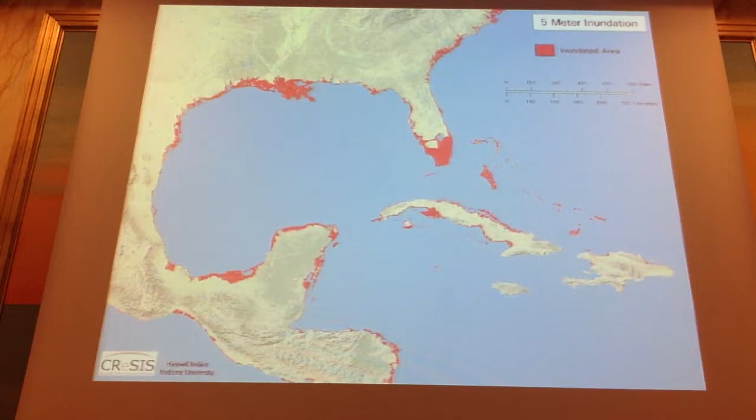So what we have to expect is basically water rise all over the world, and even if it's just 5 meters, that will really have a huge impact on a number of countries like the United States, Asia, Europe, and Venice as well, to give just a few examples.

And so our current approach is regulation. We would sit together, the governments of the world, and try to negotiate a law, a contract, whatever, and that would be implemented on a global scale, basically telling companies and countries and citizens what to do.

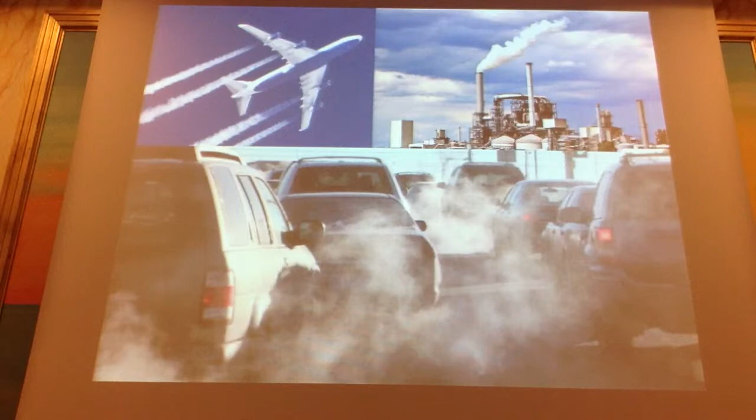However, negotiations have been going on for many years now, and this law is still not in action. And as a consequence, basically, it happens that we still have a lot of pollution, we have a lot of CO2 emissions, and we are far away from the goals of CO2 emission reduction that we wanted to reach.

So the question is, this top-down approach, where basically there would be something like a world parliament that decides what everyone has to do, is this maybe not so efficient as we expected it to be, and are there any alternatives? Because we don't have the time to wait, we have to act, we have to come up with solutions. I'll come back to this at the end of my talk.

And altogether, I'd like to argue for a new paradigm. This paradigm basically says that if the complexity of the system is large, then you have to give more autonomy to the different components of the system to achieve your goal. That means you need to have a sufficient level of bottom-up involvement. Just telling people you shouldn't travel anymore, you should not use your car anymore, won't do it.

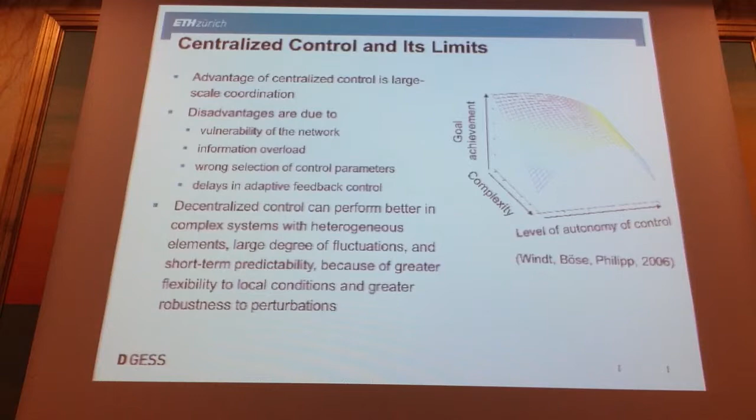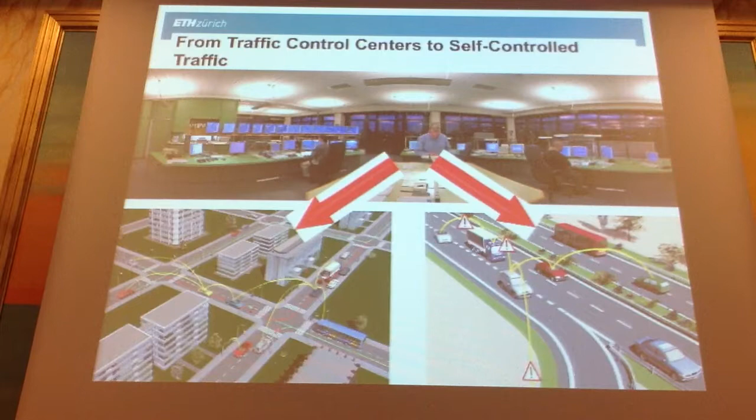In fact, we see now a trend towards decentralization. So classically we had traffic control centers to take decisions for the entire city or for the entire freeway. While today we have new kinds of technologies which are based on local interaction, local information exchange, such as car-to-car communication or car-to-infrastructure communication. And so this is actually on the way, and it seems to be superior to what we have done in the past.

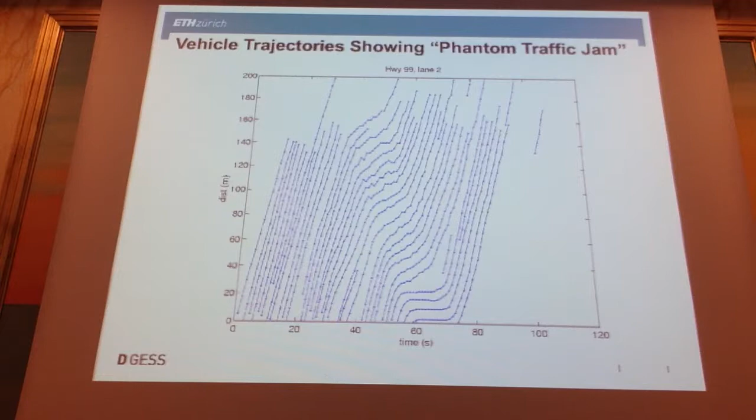So let's look into the problems that can be solved in this way. One of these problems is actually phantom traffic jams, and here are some trajectories. As you can see, the free traffic flow that we have on the left is basically giving rise to a traffic jam. The cars obviously are stopped for some time. So the question is, how can we get rid of this annoying phenomenon?

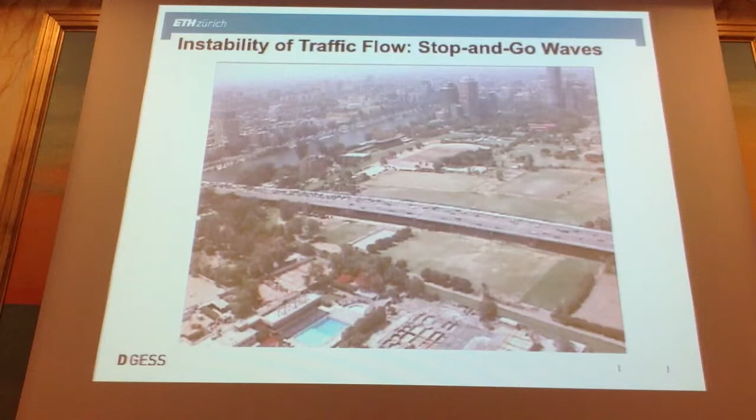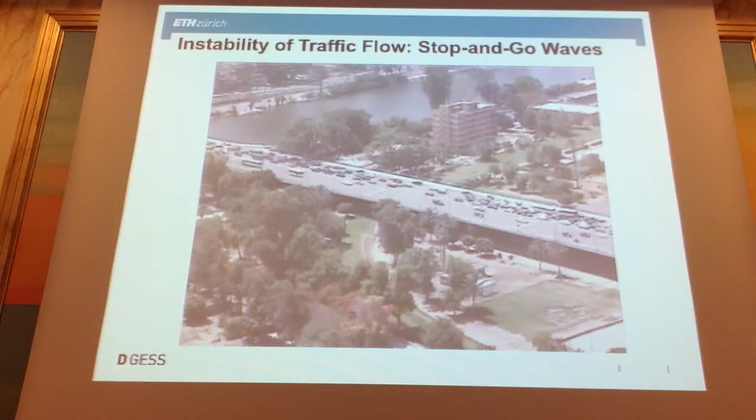Here's a video that I took in Egypt, in Cairo, and you'll be a witness of the emergence of a traffic jam on the left. There are no traffic lights, also not downstream. So now you can actually see the stop-and-go phenomenon. And you see a few cars coming in on the right, and these are the cars that basically create small perturbations to the flow. As I explained last time, these small perturbations are amplified and eventually give rise to the stop-and-go traffic.

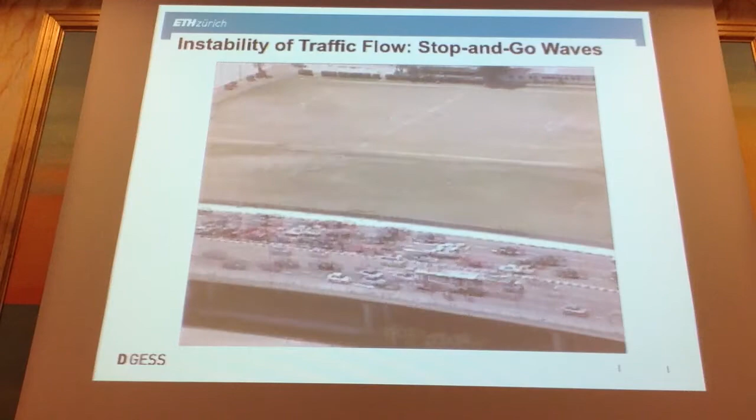So this is something that we want to understand in terms of models, and once we have an understanding of the phenomenon, we can start to come up with solutions.

Congestion patterns are actually surprisingly complex. So when we started to do traffic modeling, many people thought, okay, maybe there is a bottleneck, and behind the bottleneck there are queues of vehicles because there's not enough capacity to serve them all, and the queue grows over time. That was kind of the understanding.

And others were thinking about these periodic stop-and-go waves, but such kind of complicated structures were basically not imaginable to most scientists. There was not the data actually to look into this structure, and as the data became available, scientists were pretty amazed, if not shocked.

And I should say, if I had seen that in the beginning when I started to do traffic science, I would probably have decided to go for another subject because this looks just too complicated to come up with a mathematical model, you would think. But by that time, I had a reputation to lose, and so we had to show that we can understand this, and actually we succeeded.

So what we did is basically we looked for repetitive patterns, for elementary patterns in the congestion pattern that I showed you before, to understand those complicated congestion patterns as a composition from elementary patterns. And these are the elementary patterns. Top left is a moving localized cluster, as some people call it.

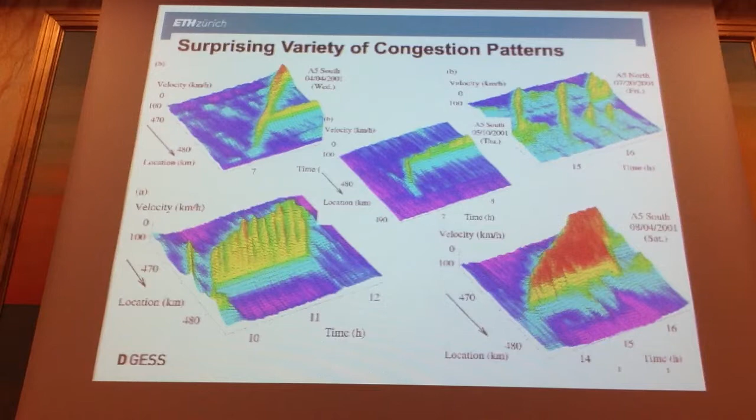Top right, stop-and-go traffic. Bottom left is oscillating congested traffic, and bottom right is homogeneous congested traffic. So the question is, what are the conditions under which these kinds of phenomena occur? Can we come up with models for this? In fact, one of those models that describes all those phenomena, these elementary patterns, is the intelligent driver model.

It's a micro model which looks at single cars. It has two equations. One equation of motion, the first one, basically says that change of location of vehicle alpha with time is given by the speed, and that's trivial. But then the question is how to model the change in speed—the second equation, the acceleration—and somehow that depends on the distance, on the velocity, on the relative velocity, delta V.

And there is another quantity in here, which is this quantity S star, which represents the desired distance as a function of the speed and the relative velocity. It's basically chosen in a way that you would create accident-free driving.

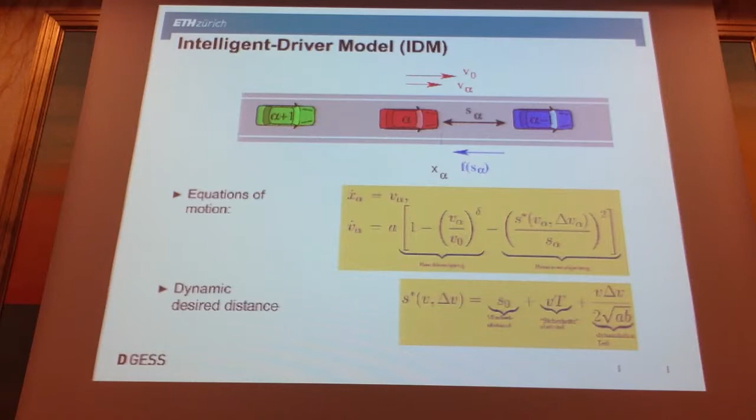Okay, so this can be simulated, and with models like these, and also some macroscopic models, you find patterns such as the ones shown over here. In fact, we have the moving localized cluster, pinned localized clusters, stop-and-go waves, oscillating congested traffic, and homogeneous congested traffic.

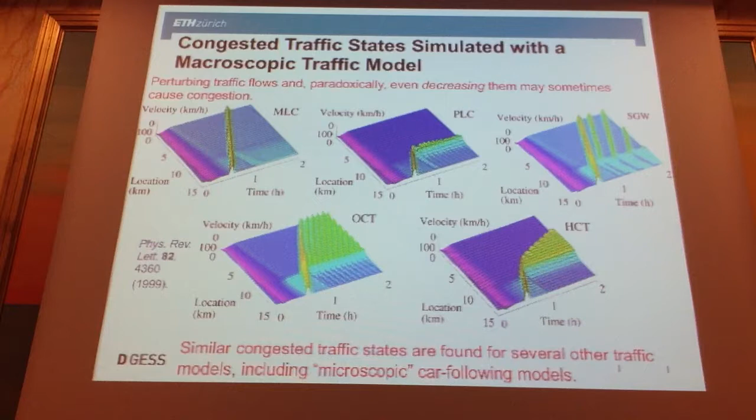Even though this simulation was done with a very simple model, we have reflected here that there are cars and trucks with different driving styles, and all these kinds of things. So despite all the simplifications we made, we find these ideal, typical elementary patterns. And in fact, it's even possible to understand the parameter regimes under which these different kinds of patterns can exist, in an analytical way.

So we call these diagrams phase diagrams. What it shows is the upstream traffic flow on a freeway, Q-up, on the y-axis. We're looking here basically at the freeway with an on-ramp. The on-ramp creates a flow, delta Q, that is the inflow.

It basically takes away a certain capacity from the freeway. That capacity used for the inflow is not available anymore for those vehicles that come from the upstream part of the freeway. So delta Q is a bottleneck strength, you could say, but at the same time it's the inflow. And so basically if you add this up, Q-up plus delta Q, that's the total traffic volume downstream of the on-ramp.

So what you see is as the total traffic volume increases—as we go from bottom left to top right, traffic volume increases—we go from free traffic to congested kinds of traffic. Red and brown is congested traffic. And you can see two diagrams here, and that's interesting.

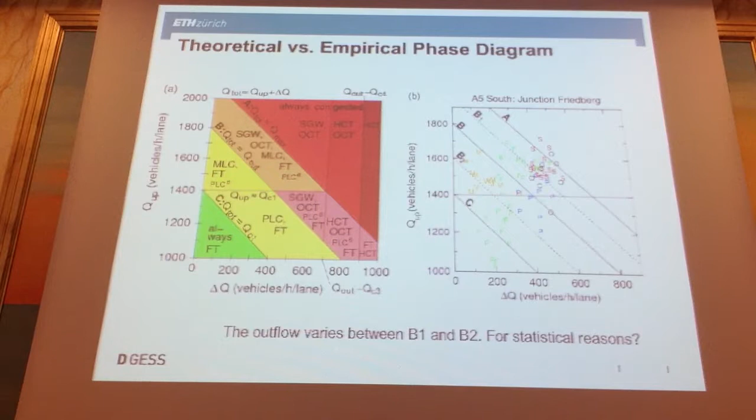The nice thing is that the empirical data are well consistent with the phase diagrams I showed you. You can clearly see clusters of certain traffic states - localized clusters in orange, pink, localized clusters in blue, the stop-and-go stuff in red and black. There is a nice agreement, and in fact we've even been able to calculate the extension of the congestion patterns in space and time.

So these are predictive models. Even though these are nonlinear, complex models, there is now an analytical theory of these kinds of traffic patterns, and this is a powerful theory - a big success story of complexity science, I would say.

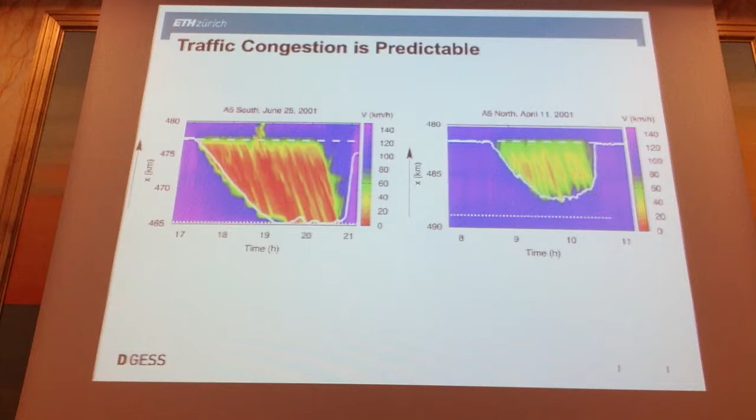Now the interesting point is that cars are becoming intelligent now. Of course you can equip them with all sorts of sensors, and there is onboard data acquisition, which we could call perception. There's inter-vehicle communication. But the question is, what is the traffic state that my car is in? Maybe you cannot determine this clearly from the data you can measure - distance data, acceleration data, and so on. It could be one of several congestion patterns if you just rely on your own measurements, so you would like to exchange information with cars in the neighborhood to learn more about the situation in this area. That's why we need inter-vehicle communication.

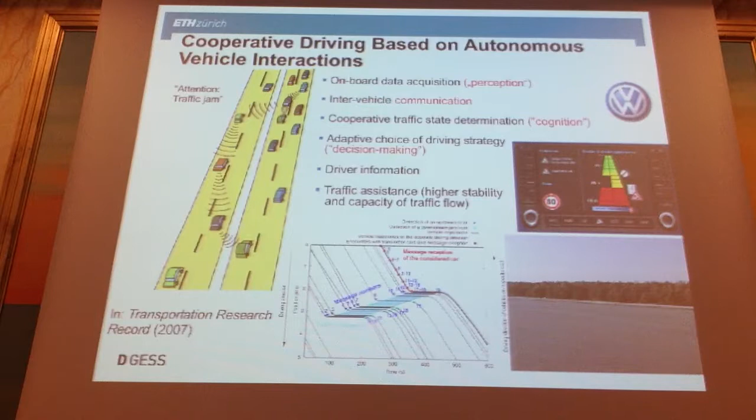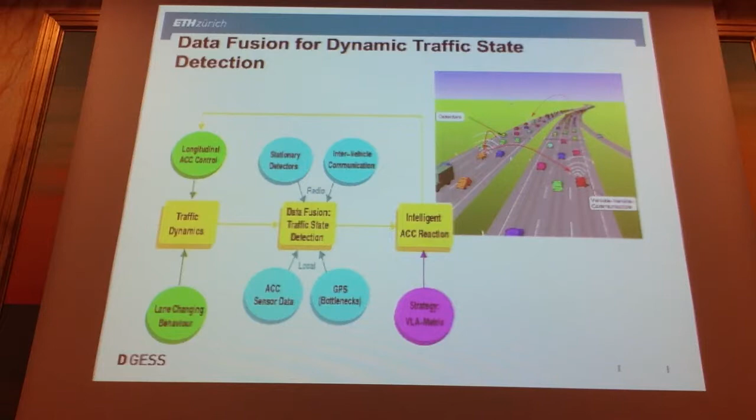Now, in fact, there are a number of different data sources merged in these kinds of systems. We have stationary detectors, inter-vehicle communication, GPS sensors, acceleration sensors, and so on. So today, more and more of these sensor data are being integrated to get a better picture of the situation you're in. Then the question is, what do you do in what kind of situation? Maybe you remember that in the intelligent driver model there were a number of parameters like acceleration, deceleration, time gap between cars - all of this is being recorded.

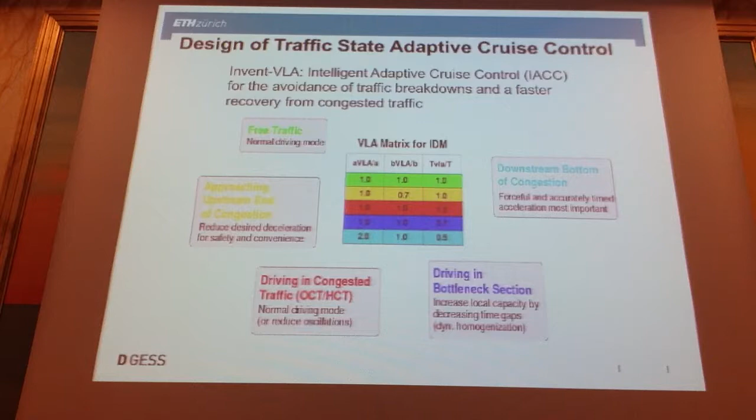And so if you implement this, actually, as I already showed you last time, we can overcome this annoying stop-and-go traffic.

So what we have on the right-hand side is the coffee meter, and Martin Treiber, who programmed this, is very proud of it, of course. This is a measurement device that measures abrupt change in acceleration. So if it spills over, that means it's not a comfortable driving situation, right?

Now, we also invented this car that can be turned into a helicopter, and that allows us to see what are the reasons for the stop-and-go traffic. The perturbations are basically created by the few cars that want to get on the freeway. We accelerate the presentation, but the inflow stays the same all the time, still stop-and-go traffic.

Then we turn on the traffic assistance system. It's based actually on a particular kind of adaptive cruise control. It means really local interaction only. And the adaptive cruise control, however, has been designed in a way, and interactions have been chosen in a way, that the interaction would create a collective effect, a beneficial collective effect also for the other cars.

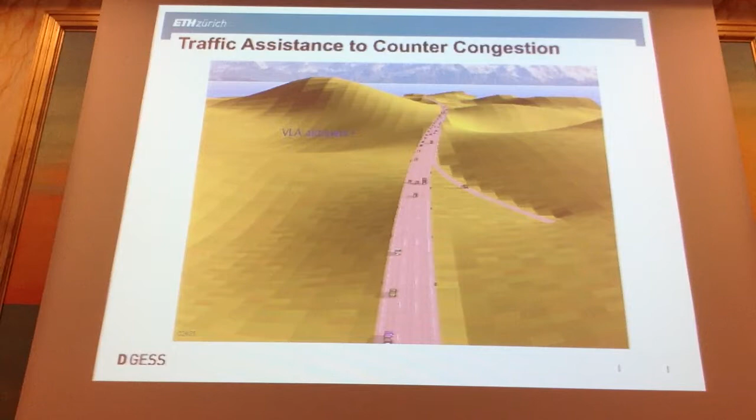That means even if you have only a 20% equipment rate, all the cars would benefit from this, as we see over here.

So in the middle, you can see as the percentage of equipped vehicles goes up, there's a dramatic drop in the temporal extension of the stop-and-go that we can see on the left. With no equipped vehicles, you have a large congestion. With 10% equipped vehicles, it is dramatically reduced, and with 20% equipped vehicles, there's almost no congestion anymore.

When you look at travel times and fuel consumption, also the effects are very large. In fact, a small deficit in capacity is actually producing really tremendous increases in travel times. The travel times could basically multiply by a factor of 2 or 5, sometimes even more. So these increases in travel times can be largely reduced.

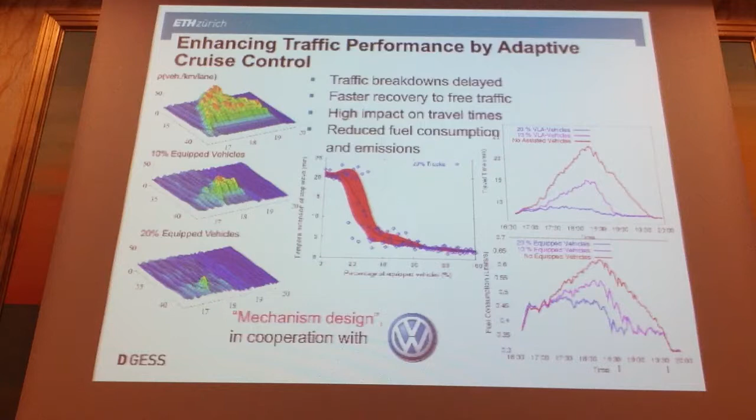And that was very important because in the past, many strategies would work only if all the cars would be equipped.

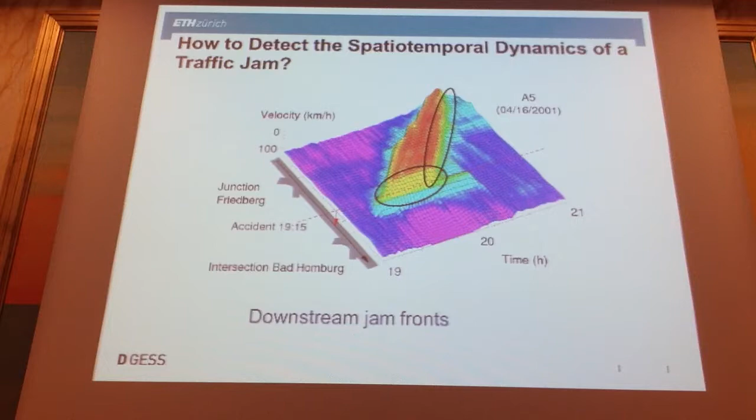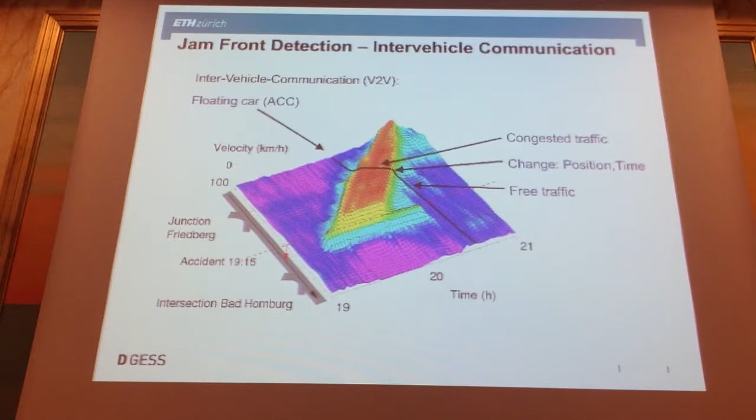Now, one of the open questions still is, how do you determine the location of the congestion front? And that has been done also by means of inter-vehicle communication. You can determine the trajectories of vehicles through these congestion patterns, and there are certain areas where the cars accelerate, and other areas where they don't. From these points, you can basically collectively determine again the location of the fronts.

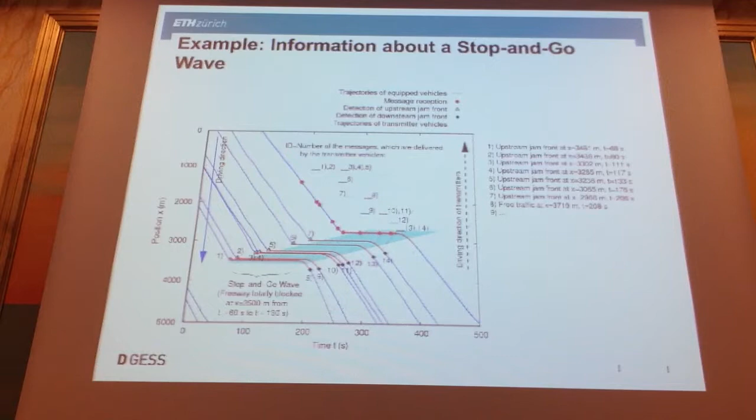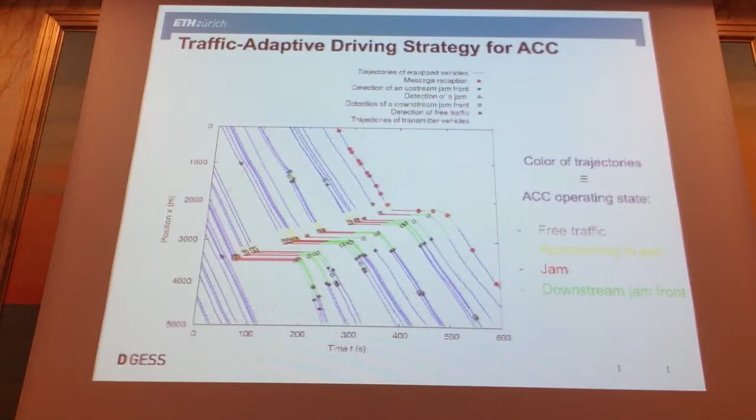And that allows you then to switch basically the driving style as needed, so you can see that over here. So collective measurement, collective intelligence also in a sense - now it's important to be able to solve these problems based on local interactions, but it can be done.

And then another question was, how do we make inter-vehicle communication effective? Because the communication ranges are just about, say, 300 meters around a single car, and in the beginning there wouldn't be many cars who also have inter-vehicle communication devices in them. So there's nobody to talk to, you cannot communicate your knowledge to others.

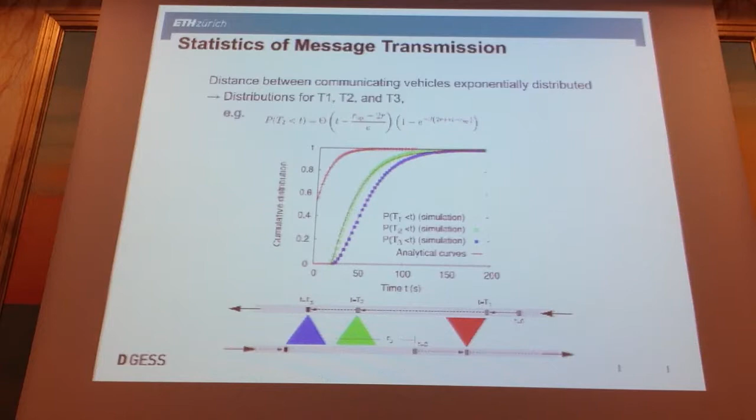If you pass your information, the red triangle, to the opposite direction of motion, it's just a matter of time until an equipped vehicle passes by. You hand over your information, that vehicle carries it upstream and passes it back to your driving direction. Starting from 3% of equipped vehicles, this kind of communication becomes useful. So that's other-regarding information - you have to collaborate with the opposite flow of vehicles.

This is a way we could address traffic flow problems on freeways. In many cases, you wouldn't have to build additional lanes or roads, you'd just manage space more efficiently with modern information and communication technology. Of course, we cannot infinitely increase capacity, but it's probably a more environmentally friendly way of overcoming congestion problems than classical approaches. From that point of view, it's the smart approach.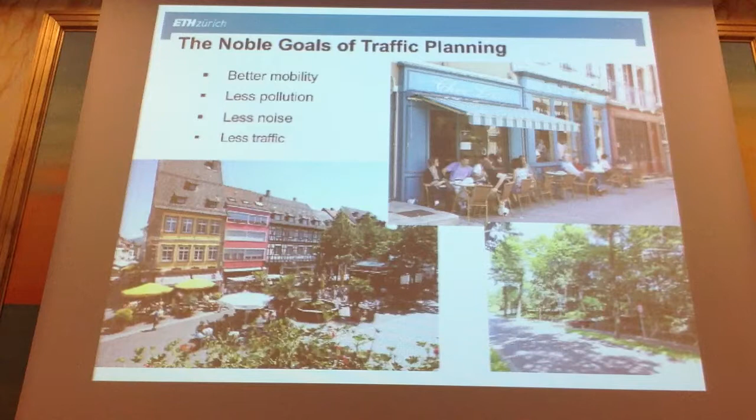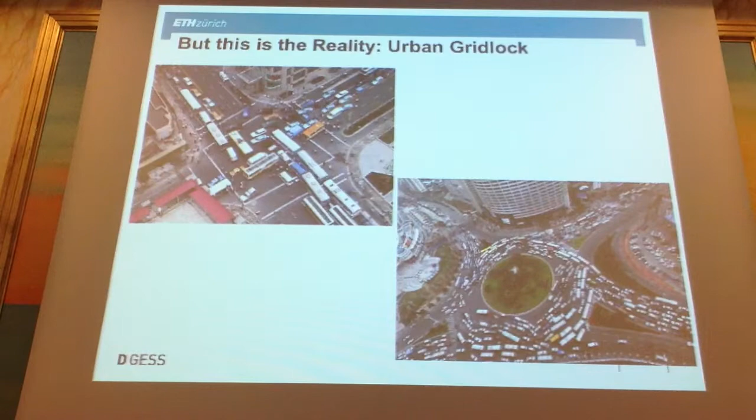The question is, can we also do something in city centers, not just on freeways cutting through the city? We'll have to see. Urban traffic flows are actually even much more challenging than freeway traffic flows. We'd like better mobility, less pollution, less noise, and less traffic, obviously. But this is the reality now: urban gridlock, and it can be really terrible. You can easily spend half an hour in a traffic jam.

By now we have a much better information system. In the morning before you go to work, you can look up a web page and it would tell you so much congestion on these streets or not. But congestion is still there. You could decide to go later if your employer allows you to do that, and in fact it has improved the traffic flow situation. But the question is, why aren't we better than this?

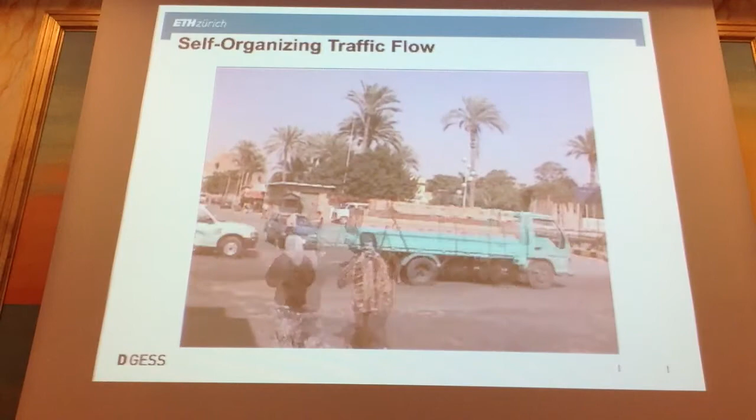So could we scale that up to city scale? Could we come up with a flexible traffic control that would be able to adjust complicated street designs, not the Manhattan kind of design, which is easy to optimize, but most European cities are just messy in terms of their structure. And then there are particular events such as Olympic Games, soccer games, and whatever.

You want to be able to deal with all this, with accidents, and with building sites, and how would we do that? Well, at that time I said, let's start from scratch. I was interested in finding out was it possible to come up with a self-organization principle that would basically coordinate traffic flows.

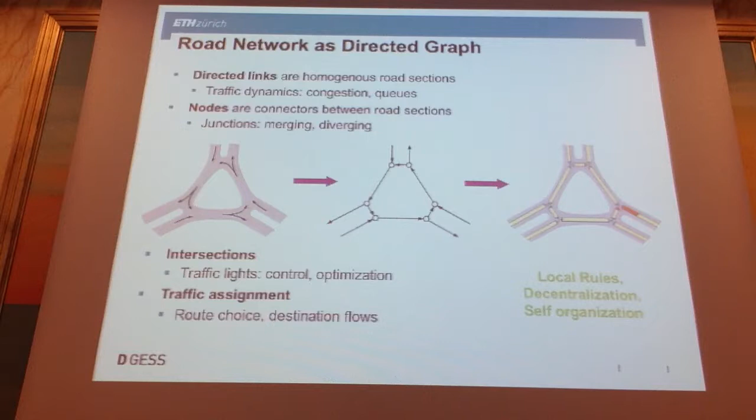And I was interested in whether this would be superior to our today's traffic light control. But the first moment the ambition was just to find a self-organizing approach. And for this we first had to represent your street network in your computer. So we'll represent the street network by a mathematical graph, and then you give certain capacities to the links and to the nodes, and you have to specify the dynamics on the links.

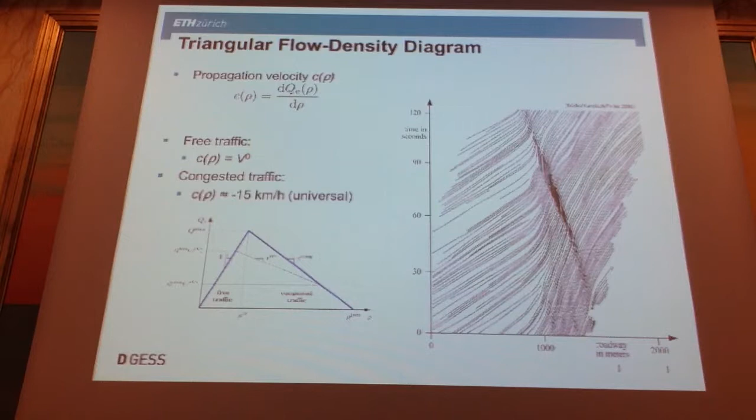In this case we've used a very simple model, the so-called Lighthill-Whitham model, which is just representing flow conservation. No vehicle just disappears or drops from heaven, which usually doesn't happen. And the other element that we did was we assumed a flow density diagram that was actually triangular. The reason for this is, A, it's good enough apparently, B, it allows you to do a number of calculations.

I think I've taken out really the busy slides, the ones with the heavy mathematics on it. But the Lighthill-Whitham model is a partial differential equation. It turns out if you want to solve this numerically it's more difficult than you would think, because these models produce shock waves, that means discontinuities in density and speed, and this is something your numerical procedure doesn't like. So in order to have a reasonable approximation you need very small time steps, and that makes your simulation inefficient, and then you cannot simulate a large city anymore.

So what you can do though is analytically integrate the partial differential equation, assuming the triangular flow relationship, and then you get delayed differential equations, so no partial differential equations anymore, and these can be handled much more easily. Here actually some relationships, so you see in the lower formula t minus T i, this is the delay time, it's of course time dependent. So it's really a very interesting mathematical problem.

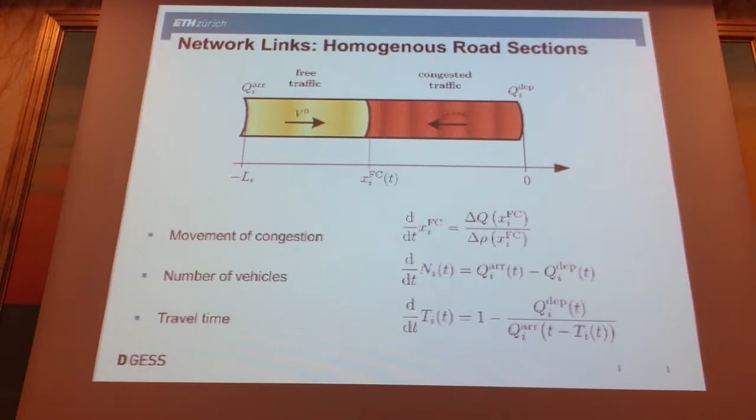Actually a similar thing happens even on freeways. So when the traffic flow breaks down, the effective road capacity drops by about 30%. That means at the time during the rush hour when we need all your capacity available, you're losing capacity. The very same road cannot transport as many vehicles anymore. So the adaptive cruise control system basically keeps up that capacity that you had before.

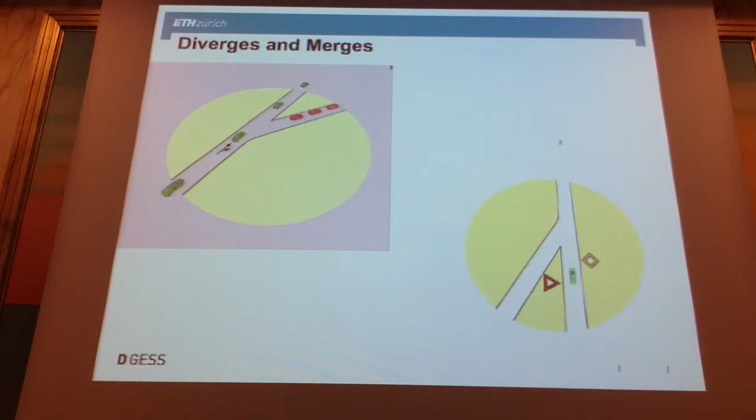And then we still need to take into account traffic lights, and we do that with a prefactor which is representing permeability. So permeability is 1 when there's a green light, permeability is 0 when there's a red light.

Okay, so there are pretty many elements, as you can see, of this model, only to get started. It's really a complicated problem, and I should tell you it was one of the most difficult projects I ever did. I'm somebody who always likes to have intuition, imagination of the processes going on in the system, and it was very difficult for me to imagine all this.

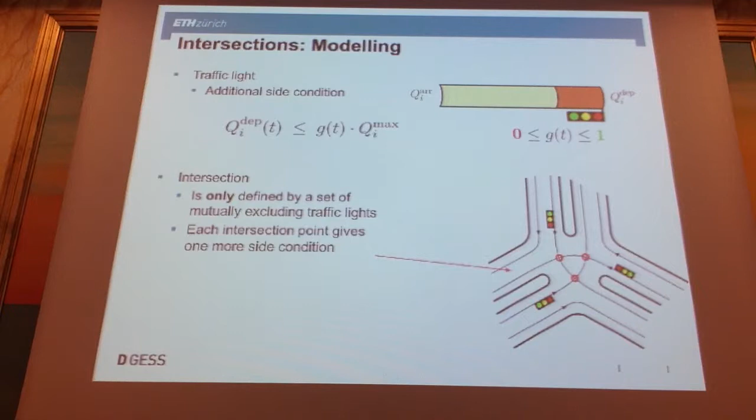But you have young brains, so it's just the right time to do these kind of problems. Of course, once you have your first gray hair, forget about it. So you have to be quick.

At that time, it was Stefan Lämmer, my PhD student, who was dealing with this, and he was doing pretty well. He just wrote me an email yesterday that the implementation in Dresden has been finished, and they're just starting their tests, so it became a real-life implementation.

Okay, so what's the problem? I already indicated coordination of traffic lights is the challenge, and here just two of them. We'd like to have a green wave, of course, so we wouldn't like to stop the platoons of vehicles several times.

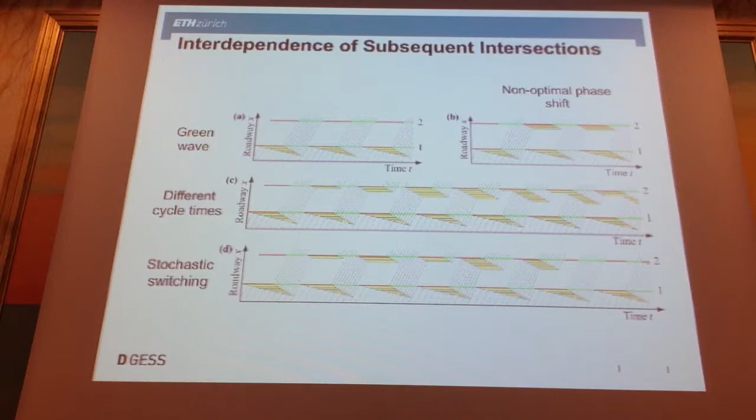There are so many things that you can do wrong. It could be non-optimal phase shifts, it could be different cycle times, it could be stochastic switching or whatever. Almost everything you do is wrong, unfortunately. It's useful, therefore, to get an intuition of the different kinds of situations that we can have in the city, and I actually identified four regimes.

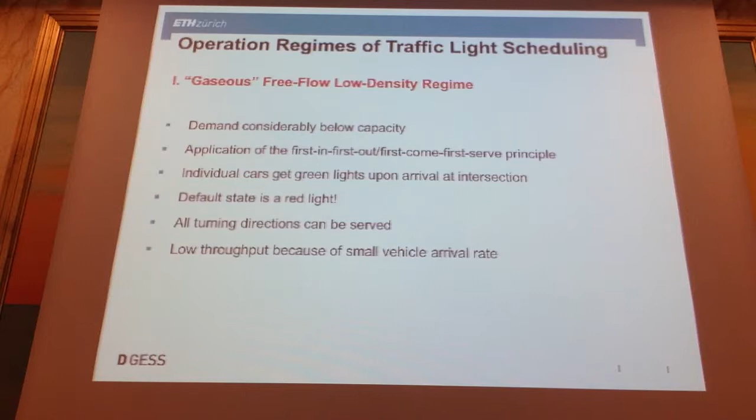I call the first one the gaseous, or free flow low density regime. Just imagine at night, basically there are more or less never two vehicles arriving at an intersection at the same time, and then you do first come, first serve. You basically make sure you turn the traffic light green whenever a vehicle arrives. It's more or less the situation represented in this video over here. It's already a little bit too much traffic, but anyways, pretty much this first come, first serve principle.

Unfortunately, this is not the kind of situation that we have all day. So traffic volume will increase, and it will happen that two or three vehicles arrive at the same time, and we cannot let them go at the same time because we don't want to have any accidents. So we need to prioritize, and the question is, how do we do this?

What happens is that platoons of vehicles are formed, and you would think that's a bad thing, but in fact it's not. For some time I actually thought it wouldn't be nice if we had a technology that would just implement first come, first serve, and create a gap in the intersection for the moment in time where you arrive at that intersection, and just adjust your speed a little bit to be there at the right time. Actually there are research projects that try to do exactly this, until I eventually understood, oh no, it's actually not the best way of managing your capacity.

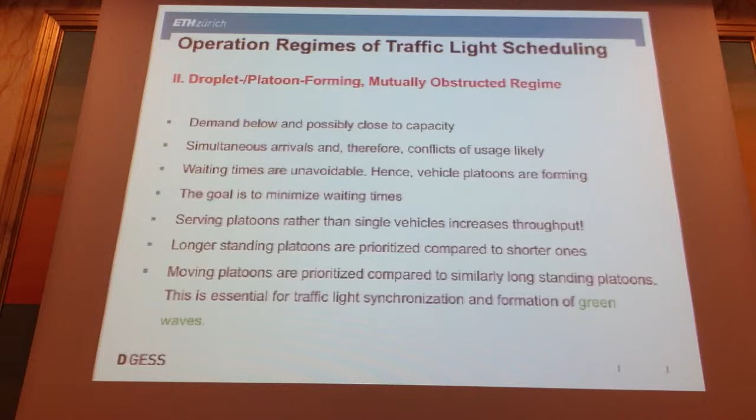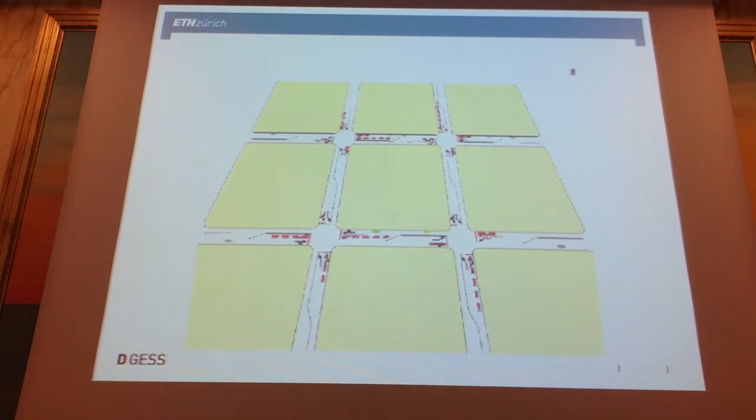So what you want to have then is a green wave. In fact, the simulation over here is showing the situation. See, green light is given down there, and then a green light that was also up there, and same thing now, all the vehicle flows from left to right and right to left. Okay, so that can be done.

But unfortunately, during the rush hour, traffic flow will grow even further, and will sooner or later reach capacity, most likely, so in most cities, and even go beyond. So what can you do? Do you have to give up?

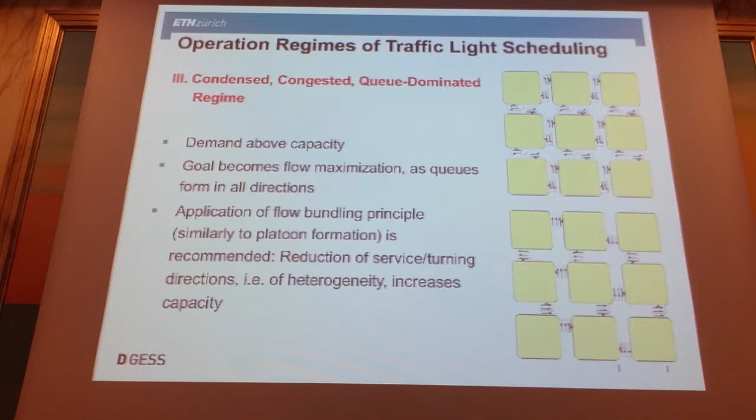Never give up. Never ever give up. You're a scientist, you need to use your fantasy. So you have to be innovative.

It turns out that in many cases we actually have 4 phases, say. And you need the 4 phases because of left turning. If you disallow turning left, you just need 2 phases. That means rather than having to wait 3/4 of a cycle time, vehicles would only have to wait half of the cycle time. So we can serve many more vehicles. Of course, those who want to go left would have to go right 3 times. But if you don't do that all the time, this is a more efficient way of organizing it.

And while in Europe, people would say, okay, you're crazy, you cannot just forbid left turning, Americans can do that. Between 7 and 9 a.m. and between 4 p.m. and 7 p.m., it's just not allowed. I saw that in Washington, I believe. So, be innovative, think beyond the institutional settings that we have.

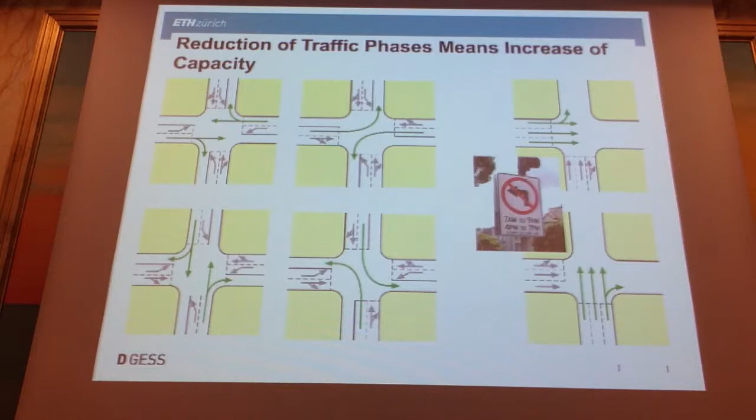And you could also say, okay, if we don't turn left at certain times, why don't we use the left turning lane for traffic that goes straight? So we could use that capacity to increase the capacity even more. And we could even have a unidirectional flow, as shown down there. So we wouldn't lose the lane for left turning.

For Europeans this again sounds pretty crazy, but if you go to the Golden Gate Bridge, it's normal. It happens every day that in the morning most of the lanes are used inbound into San Francisco, while in the evening, most of the lanes are used outbound, out of San Francisco. That means the lane usage is variable over the time of day. So why shouldn't we do that? With new technology coming up, that can be more and more easily organized. So we should use capacities much more flexibly.

Then the question is, okay, if we can reduce 4 phases to 2 phases, couldn't we just have 1 phase? That basically means no traffic lights at all. In fact, you can think of designs where you have rotary traffic, and many cities are now doing this, and it works pretty well up to a certain capacity. It's not the solution for everything. It's a good solution for most intersections, or for many at least.

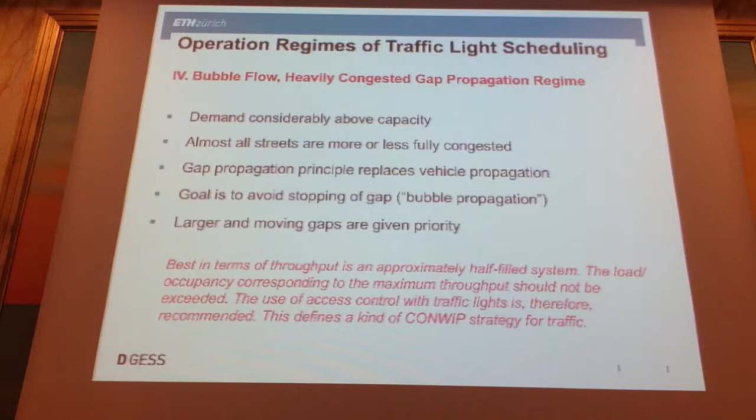And then there's a 4th phase where you are beyond capacity. Things are heavily congested. The question is, do we finally have to give up? No, of course not. Of course not. God forbid. Now, the issue is that the gaps in the crowded roads are kind of the scarce resource. So you manage the gaps. You switch your traffic lights to make sure that your gaps are always moving.

And this is what we're doing over here. So cars and gaps, in a sense, are exchanging their roles for the traffic light control. So you see, we keep those gaps moving, because that's the only way of finally getting the cars to go.

Okay, so in principle, we could say now we understand the 4 different phases of traffic flow in cities, and the next thing we would have to do is find conditions under which we have to switch between this and that kind of traffic state, identify the traffic state in the first place, and then find suitable switching or transition routes. But there's a much easier, much simpler approach.

As you can see over here, at this bottleneck, we find oscillatory flows of pedestrians. And it looks like there was a traffic light, or a policeman, or somebody coordinating the traffic flows of pedestrians there, but it's not. This happens by self-organization based on a pressure principle: people accumulate on the side that's not moving, the pressure grows, the pressure eventually stops the flow from the other side, the flow turns in its direction, and so you go back and forth, back and forth.

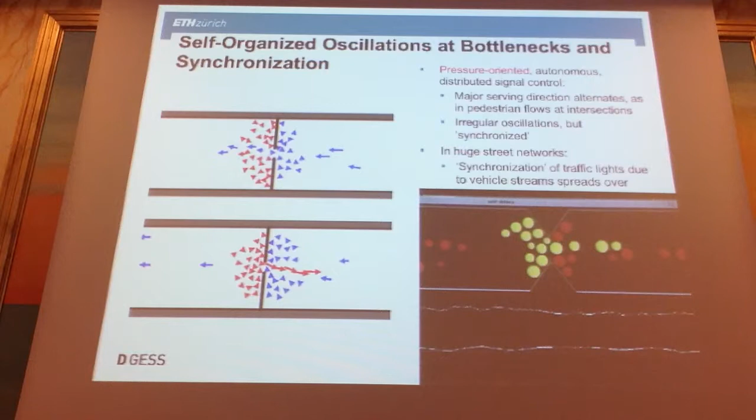So couldn't we use a similar pressure principle to prioritize flows? The idea is basically to interpret an intersection as a bottleneck in the flow, but with many more flow directions, and have a self-organization principle that turns that into traffic light switching. I mean, have the traffic flows control the traffic lights rather than the other way around. And in fact, this is working pretty well.

We've been comparing the self-control principle with established traffic light controls at intersections, like cycle-based or gap-out control, and it's working pretty well. They produce pretty reasonable traffic jams, vehicle platoons behind the red lights, but the superiority of this approach becomes visible only through the coordination between different intersections. Before we go to the coordination, let's look at the single intersection first, which is on the top left.

The question is, why can this bottom-up self-control be so efficient? Well, it's because the top-down approach requires a lot of information. Even if you have that information, you must process it. You need to go through all the possible traffic light controls, and you can change a lot - green times, cycle times, phase lengths, the order of phases, and all sorts of things. So you have an explosion of possibilities, and you cannot really go through all these possibilities in real time.

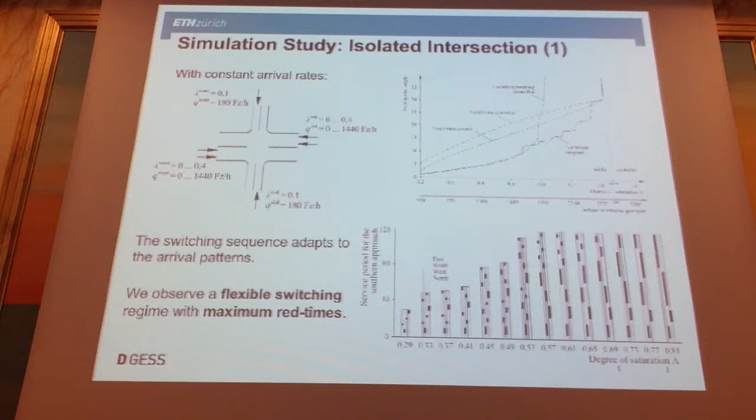Local rules. Rule number 1 is minimize waiting times or travel times of all the cars that are approaching a particular intersection. We measure the outflow but also the inflow into these road sections.

So we make a short-term prediction, and we would know that in a few seconds there will be a vehicle platoon arriving at that intersection. So can't we clear the vehicle queue behind the red light beforehand, so that vehicle platoon wouldn't have to stop, just could go without stopping. So it would save a lot of waiting time. And we would do that most of the time.

But in situations where the queue in one of the road sections grows so long that there is a risk of a spillover effect - the queue could disturb the traffic flow at the neighboring intersection - if that would happen, we quickly produce large-scale congestion in a very short time. So we have to avoid this. We have to be friendly to our neighbors, basically. If they do the same thing, I will not suffer a spillover effect. So this is the kind of approach.

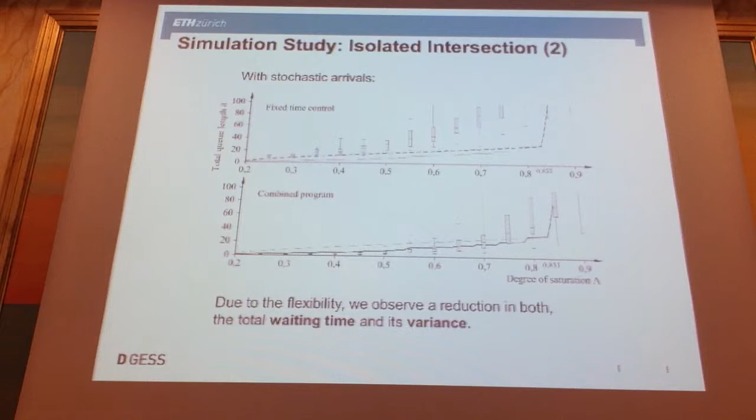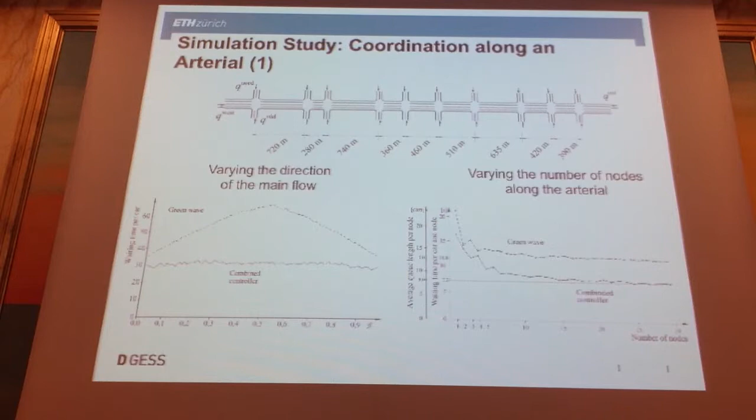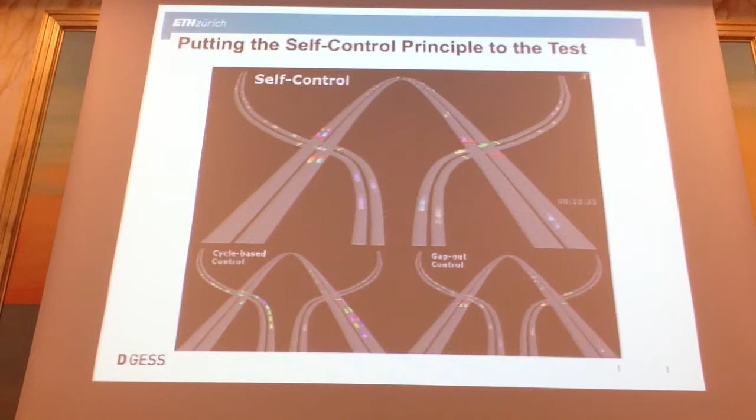The reason is that the classical green wave is actually made for one particular direction - like inbound in the morning, outbound in the evening - while our self-control approach is fair with regard to the directions. I think there will be another plot coming up, but here you can see we have this nice coordination of flows when we have several intersections. And this coordination is really important to have an advantage over the way we're doing things today.

But if you have to go the opposite way, you see that you can lose a lot of time. You will be stuck more or less at every single intersection. It can be terrible for you.

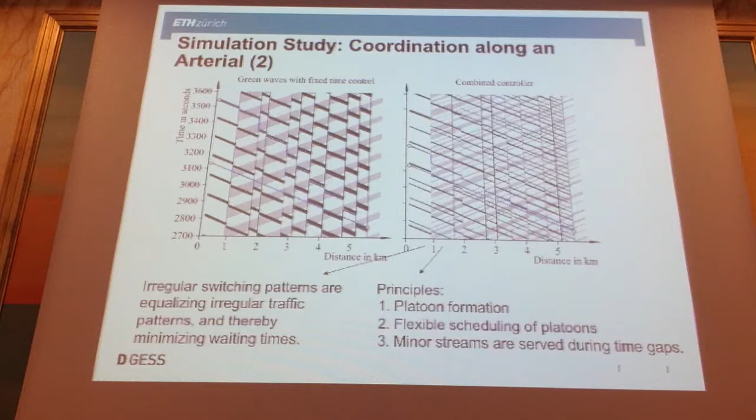So you're not just doing what everyone else does. While the combined controller, as you can see, is also creating green waves, these green wave bands are much smaller and more flexible, more variable. And it turns out that this is doing a much better job also for the opposite flow direction. Here we're not giving priority to one flow direction. We just say every car has the same weight, and we're trying to do the best job for everyone.

And the whole thing also works for situations where we have a network of intersections. So again, our approach seems to be superior.

Now, let's challenge ourselves a little bit more. Let's go away from theoretical scenarios towards scenarios with a real road network and real data to calibrate the model. This was done actually in Dresden, where I worked at that time. And it's just the center of Dresden, Dresden Mitte.

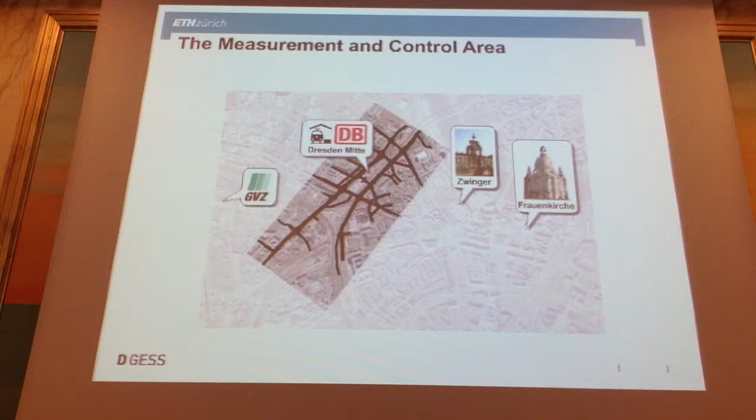There is a train station. The touristic area is just on the right, and you can see it's a pretty messy, non-Manhattan road network. And what makes things worse is that you have so many public transportation lines cutting across this area in different ways, and you'd like to prioritize public transportation.

But if you do this, the green waves that they operate at the moment, of course they had public bids and went for the best technological solution that was offered, and I think it costs several millions actually. So they have this green wave principle implemented, and they even have an adaptive traffic light control.

But they would like to prioritize public transportation. And if they would do that, it would mean that whenever a tram or a bus arrives, they would give it the green light and stop everyone else. But if you do that, your green waves are completely destroyed, completely messed up. And if that happens, you have really a monster congestion in the entire city for almost the entire day. So you cannot prioritize public transport based on that.

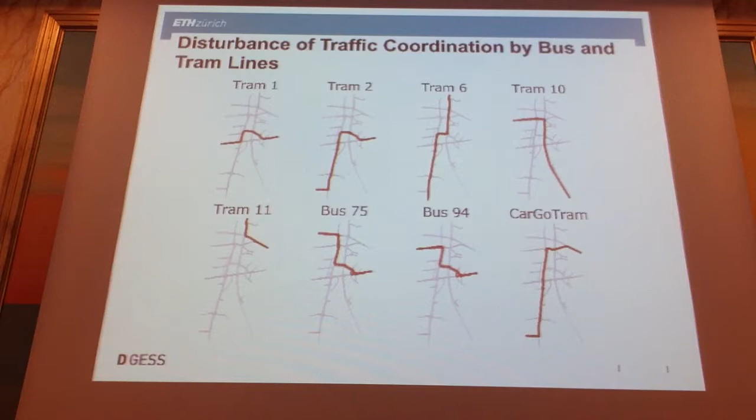So when we went to see them at the traffic center, they said, okay, there is an area where we're not entirely happy with now. Here you can show how good you are. So they didn't have a solution for this one, and they said, okay, let these crazy scientists work on this.

Okay, now one important point here is that oversaturated traffic is a little bit like oversaturated vapor. So a slight perturbation can create a condensation process, and condensation process here is the formation of congestion. So if you just let the tram or bus go whenever it likes, it would cause this condensation. So this is not the right approach to prioritize public transportation.

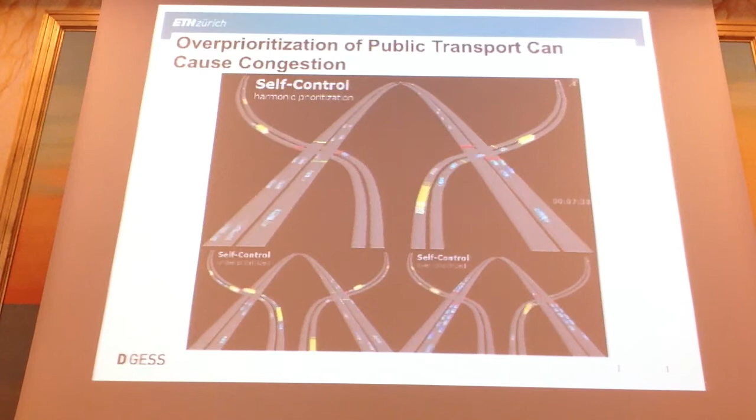What we do instead is we give a bus a weight of 30, say, equivalent to 30 vehicles, 30 cars. And if you do this, the bus or the tram might have to stop for a few seconds, but you don't feel that as a passenger of the tram or the bus. Altogether, as we will see, it will give a very good service to public transportation without messing up coordination of the vehicle flows. But if you give a too high weight, say 100, an equivalent of 100 cars, it turns out this would actually mess up the traffic flow. So you need to find the right weight, basically.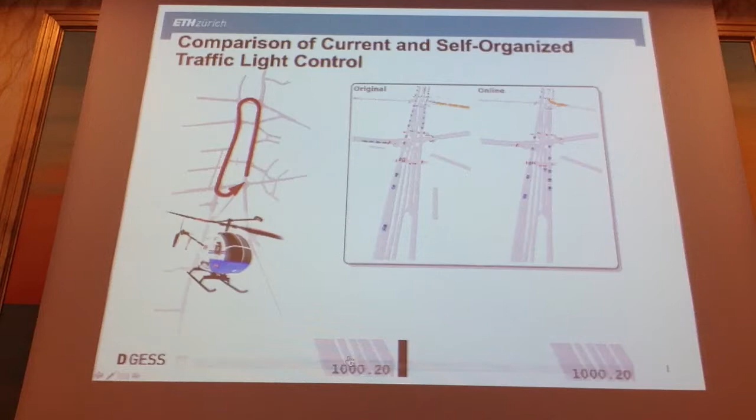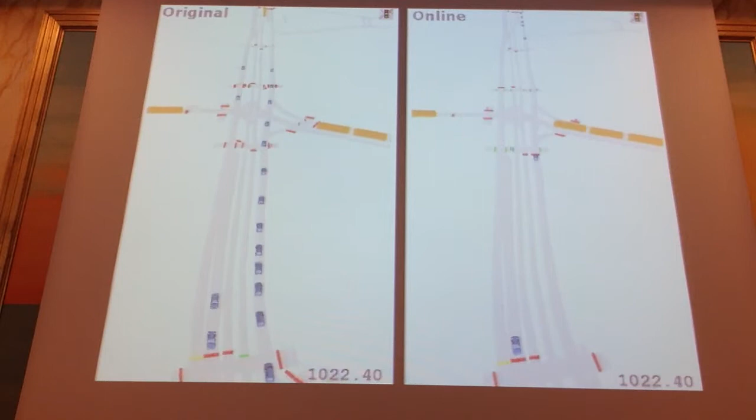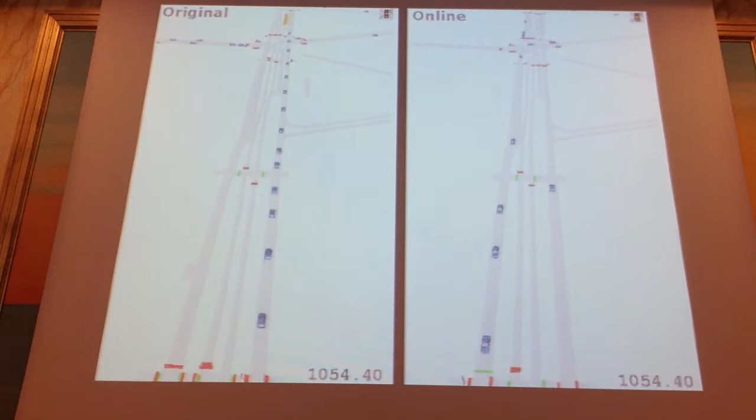If we do that, now we can compare the two scenarios, the current traffic light control with ours. Ours is on the right-hand side, and you see we have less congestion and trams are going earlier. This is exactly what we want to have. The only thing that you will ask, of course, is did they just cut out the right moment where it looks so nice to convince the audience, or is this representative for what the self-control can do?

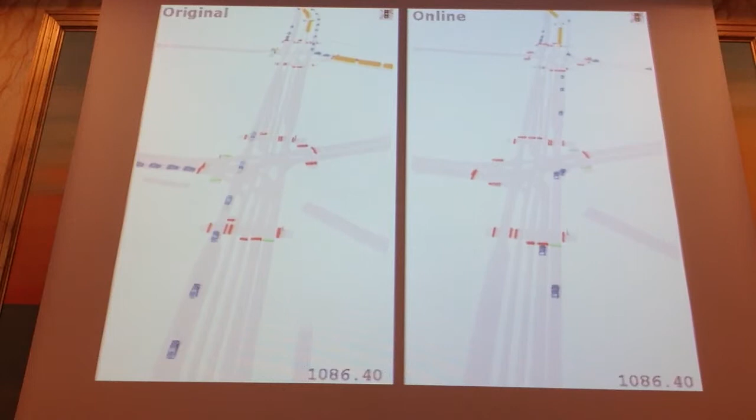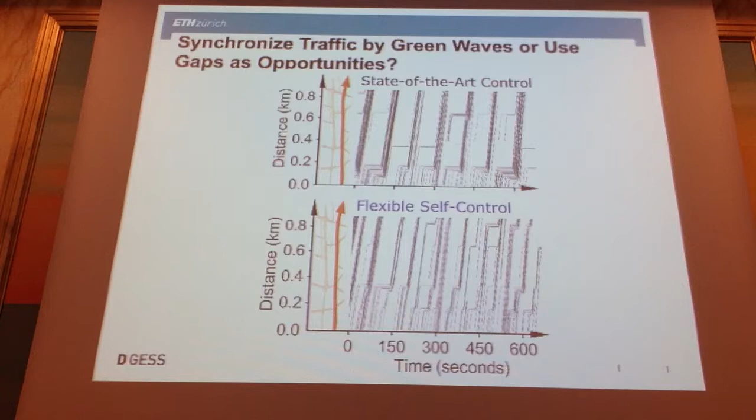As a scientist, we need to do a more solid evaluation. Before I get to numbers, have a look at the green wave. The green wave established at the moment is the one up there - these are big bands, and they're really unflexible, you could say. Down there we also have green waves, but they're not imposed on flow, they happen by synchronization and are much more flexible. Let's see what comes out here.

A huge improvement for public transportation. Of course, the previous approach couldn't prioritize public transportation, but it's not bad for motorized traffic either - there's even a small improvement over there.

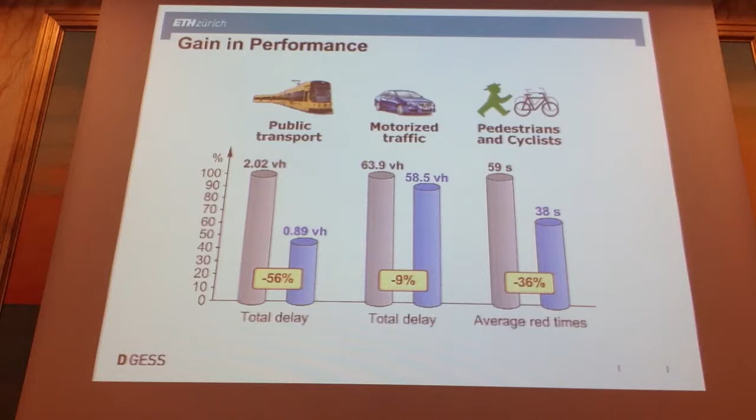Calibration with the same empirical data as before. It's also good for pedestrians and cyclists, so a very nice outcome. It's good for the environment, and it makes travel times more predictable. So why don't we do this? This is actually currently being done in Dresden - they've decided on a site, an area in Dresden where they will test this approach. Let's hope together that it convinces them and becomes a great success that spreads over many cities, so we can get rid of a lot of congestion, hopefully.

There's another point I'd like to mention, which contributes a lot to congestion, which has to do with land use - basically where we live. Classically, many urban traffic planners have in mind this constant travel time budget idea.

So if you tell them you can reduce their congestion, they'll say, oh my God, don't do this, because it will attract even more cars into the city. They want to have congestion because that's painful. They want to punish every single driver, every single citizen who doesn't use public transportation. This is a top-down, close to totalitarian kind of thinking.

The question is: is it right that if we reduced congestion, it would make things even worse? They talk about induced traffic, and of course induced traffic does exist. But would it basically fill all the freed-up capacity we've created, or would there still be some improvement? My claim is there would still be some improvement.

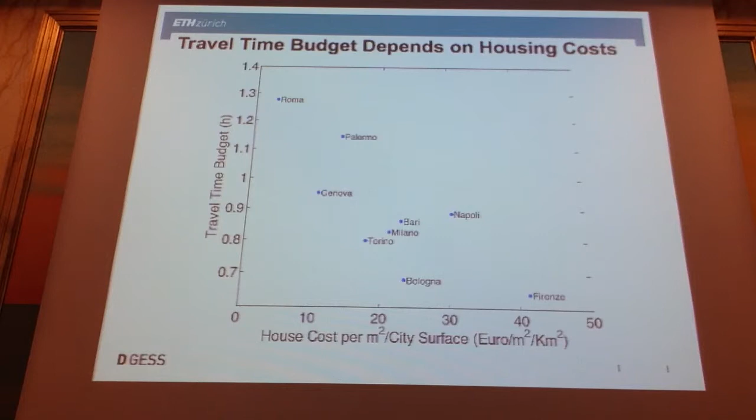There are other factors as well, but it's really one of the main factors, and it's very simple to understand. If you cannot afford to live close to your working place, you have to move out. And that means every single day you have to spend a lot of time traveling to work and back. That was the problem, and this is something that apparently is not in everybody's mind.

So I'm closing with coming back to the initial question: could we use bottom-up principles also to counter climate change? I've been thinking about this a little bit. It would be going away from nations trying, through a global government, to come up with a solution, to basically build on much smaller units, and to do that through involvement of the many.

In this case, the idea is that cities might be the right units to work with. If you want to address climate change from the bottom up, cities are basically the places where most people live, where most of the CO2 is produced, where you can reach most people. So if people in cities change their behavior, it has the biggest impact. If you want to change something, it has to happen in cities.

And how do you do this? If I tell you, you shouldn't do this, or you shouldn't do that, you shouldn't use your car, you shouldn't go by plane into your holidays, and so on, you would say, come on, I want to enjoy my life, we don't want people to tell us to change our lives. But we like to do things that are fun. So the question is, can we turn doing something for our environment, for our planet, into something which is fun? And I do think so.